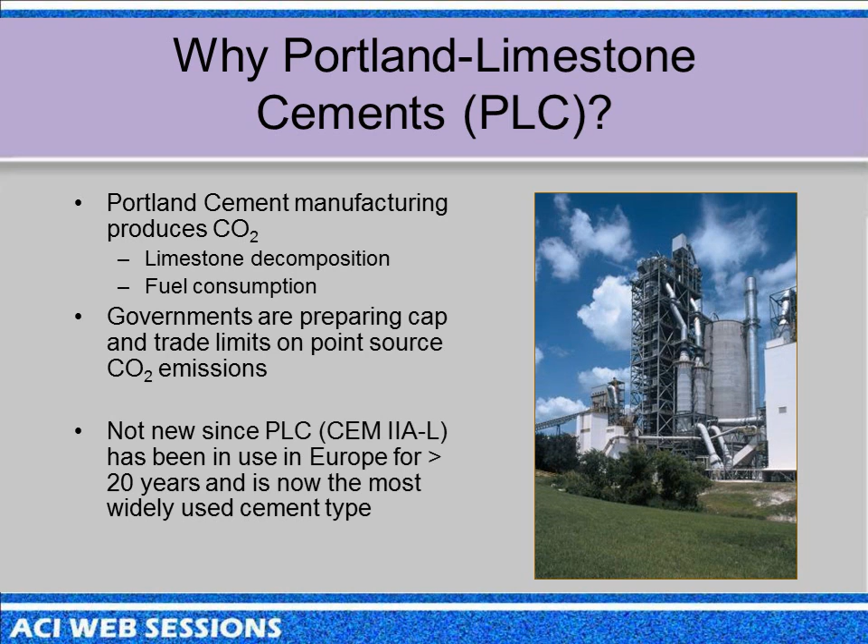And they have two types of limestone cements: CEM II/A-L, which has up to 20% limestone in it, and CEM II/B-L, which has up to 35% limestone in it. It's now the most widely used type of cement. Limestone-containing cements in Europe are now the most widely used cements of all the cements being produced in European countries.

So in Canada, which has the Canadian Standards Association equivalent to ASTM, in 2008 we came up with a new class of cements, Portland-Limestone Cements, distinct from Portland cements. We still have Portland cements, but we developed a new class of Portland-Limestone Cements in our standard, A3001, which contains up to 15% blended or interground limestone replacing clinker.

Actually, we just got rid of the word 'blended' - it has to be intergrounded because that's what the data was based on. Normally, Portland cements contain up to 5% intergrounded limestone. In Canada, they've been doing that since the 80s. ASTM's had it since 2004, I believe. AASHTO M85's allowed it since 2007.

So, in addition to reducing CO2 emissions by putting some of that ground limestone and grinding it in the clinker, you also make the limestone deposits that the cement plant's sitting on last longer, because you don't have that reduction in volume when you calcine the limestone. So they can actually increase the life of their quarry somewhat.

The other issue I wanted to make - when properly optimized, the limestone is not inert, which is one of the reasons for the intergrinding, and it contributes to the properties of cement. It acts in two ways. It acts as a nucleation material for accelerating hydration of cement because you're putting in fine powders.

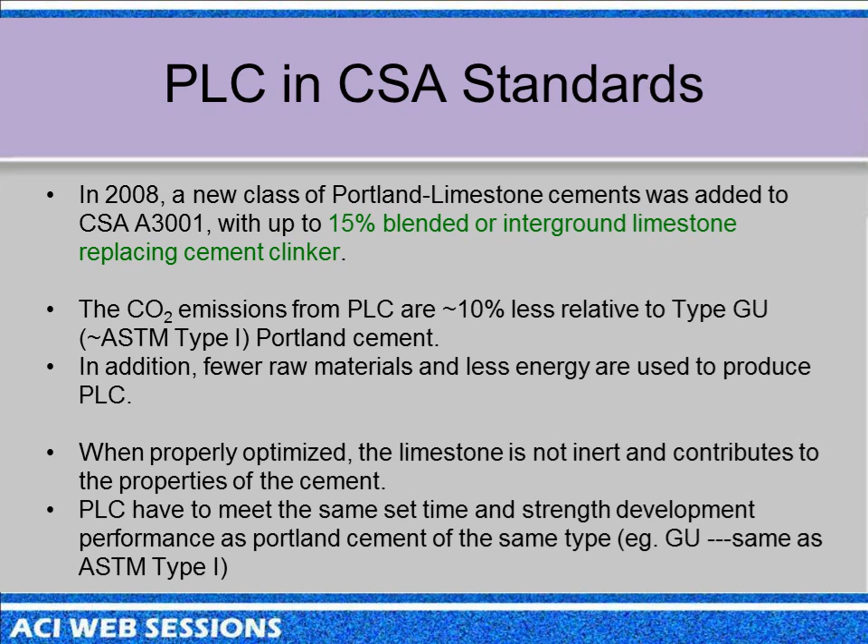Our GU cement - the terminology used in 1157, but it's the same as ASTM Type 1, general use cement. This went into the cement standard in 2008, then got incorporated into the concrete standard in 2009 to allow the use of Portland limestone cement in concretes, with the exception of sulfate exposures - I may or may not get to that depending on timing, but we're addressing that now. Our National Building Code of Canada is being updated now to include references to Portland limestone cement.

So that'll increase its use. Right now, it's largely been demonstration projects until it's in the building code.

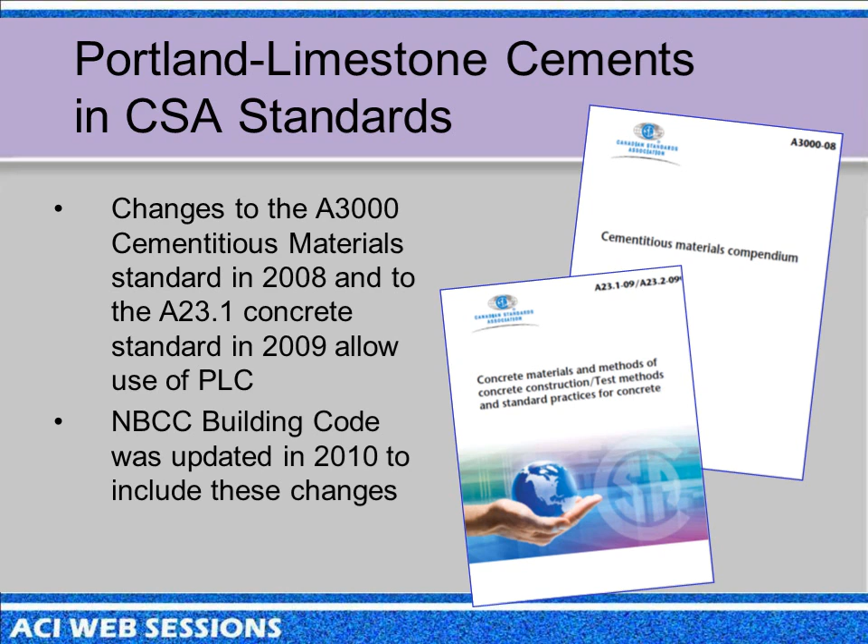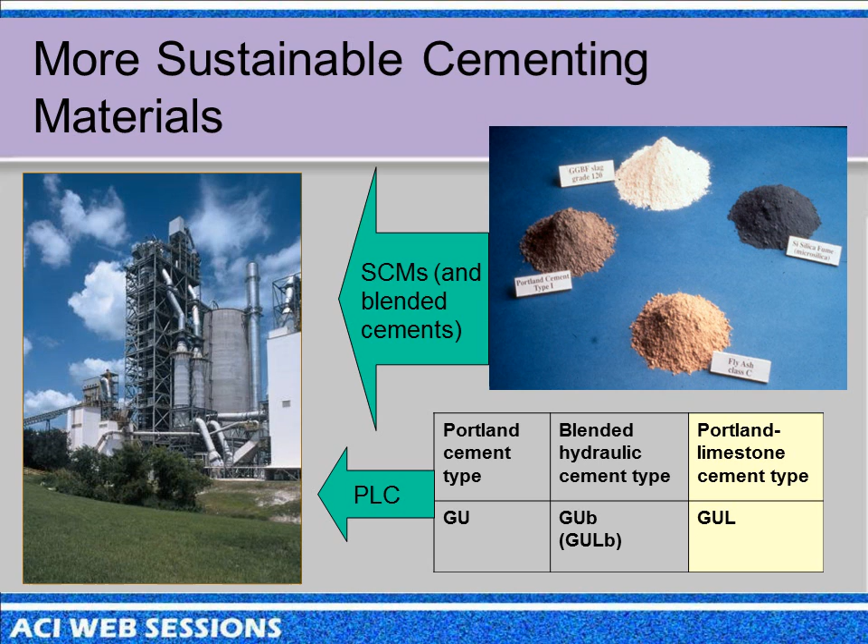This is not to replace supplementary cementing materials. People are either making blended cements or using pozzolans and slag at the ready-mix plant to get special properties like sulfate resistance, low heat, alkali aggregate resistance, and increased corrosion resistance. They do that anyway, but we don't want to impact on that. So the idea of Portland-Limestone Cements is they complement this, they don't replace it. You're not going to trade off fly ash or slag for limestone. It actually increases the replacement of the clinker with the same technical properties, and we have a lot of data showing that slag and fly ash actually work better with Portland-Limestone Cements than they do with Portland cements, which is interesting.

In the U.S., most standards don't allow this, but 1157, the performance spec for cement, does allow it, because it doesn't have requirements on the raw materials that go into the cement, just performance requirements. At least 2 producers in the U.S. are making cements and have been for a number of years with 10% limestone in them under the spec. I'll show a few examples at the end of some U.S. uses. ASTM is looking at changing the 595 blended cement spec in 2011, to be discussed at the December ASTM meeting. It will potentially allow blended cements, including limestone. Mike Thomas and I just finished a report for the PCA summarizing all the data from Canada as documentation to support that ballot item.

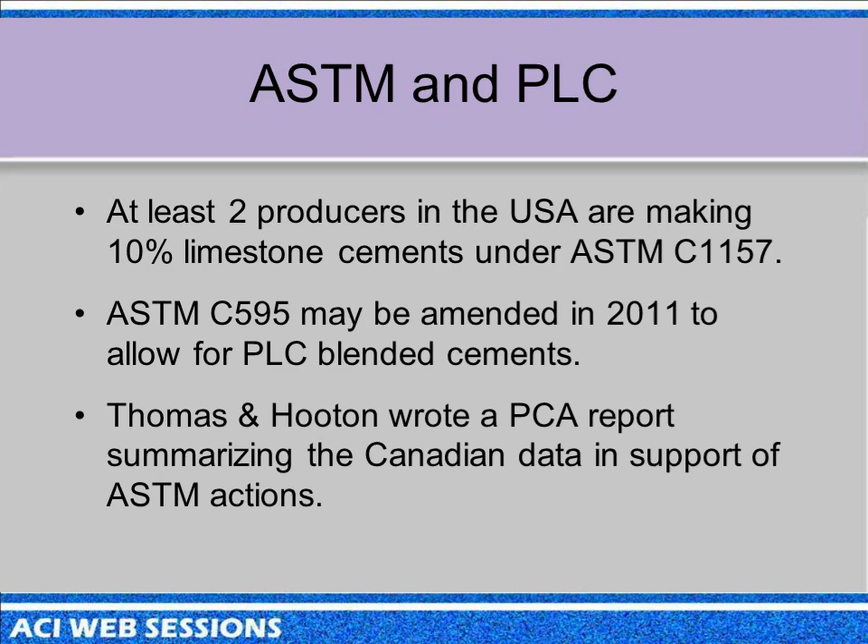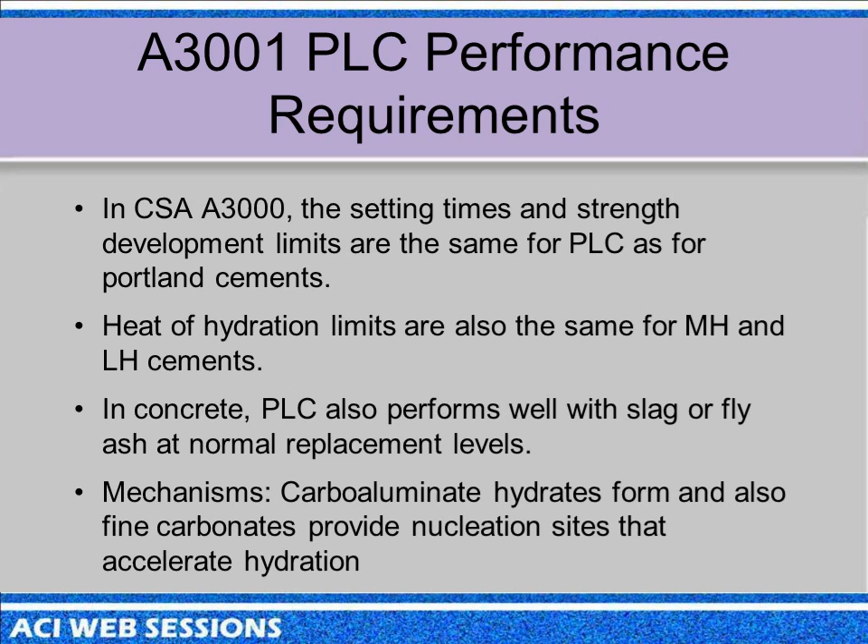As I said before, the standard says the setting times and strength are the same with Portland limestone cements of the respective types as Portland cements. For moderate heat or low heat cements, it doesn't change anything in terms of the performance requirement, the heat of hydration limits. And it works very well with slag or fly ash at normal replacement levels. I mentioned the nucleation sites. The other thing that happens is you can form carboaluminate hydrates. We're seeing increased carboaluminate hydrates from the reaction of the carbonate fines with aluminate phases in the cement, like the C3A. When you start adding things like slag, fly ash, or metakaolin to the system, which have aluminates, you increase the potential for more carboaluminate formation, and that fills in space and creates strength as well.

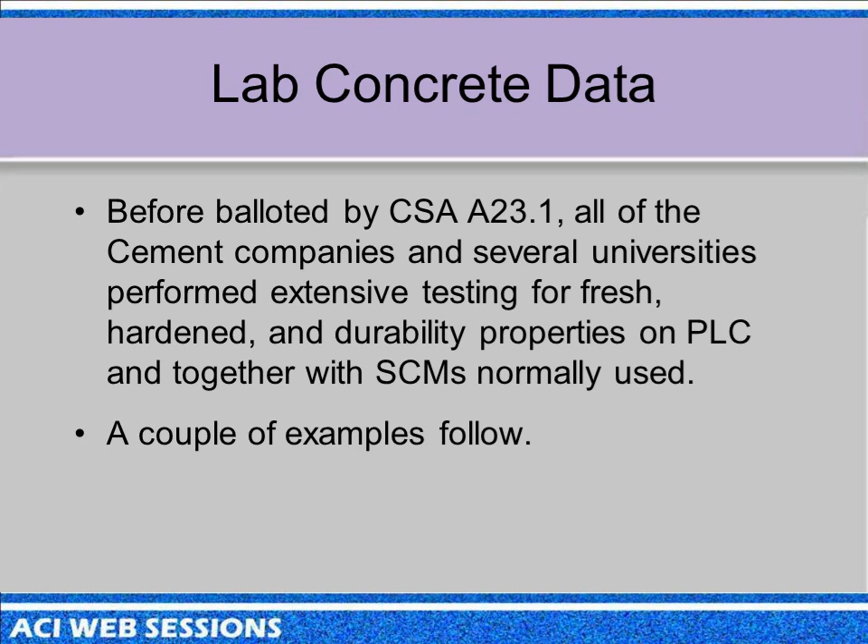We did a lot of concrete data before. We did a lot of cement data initially, and then after reviewing the literature, we did a lot of concrete data. The industry made concrete. Several universities did extensive testing on this before it was adopted in the concrete standard. One of the big issues was, could you use normal pozzolans and slag? I'll just show a couple of examples, some concretes.

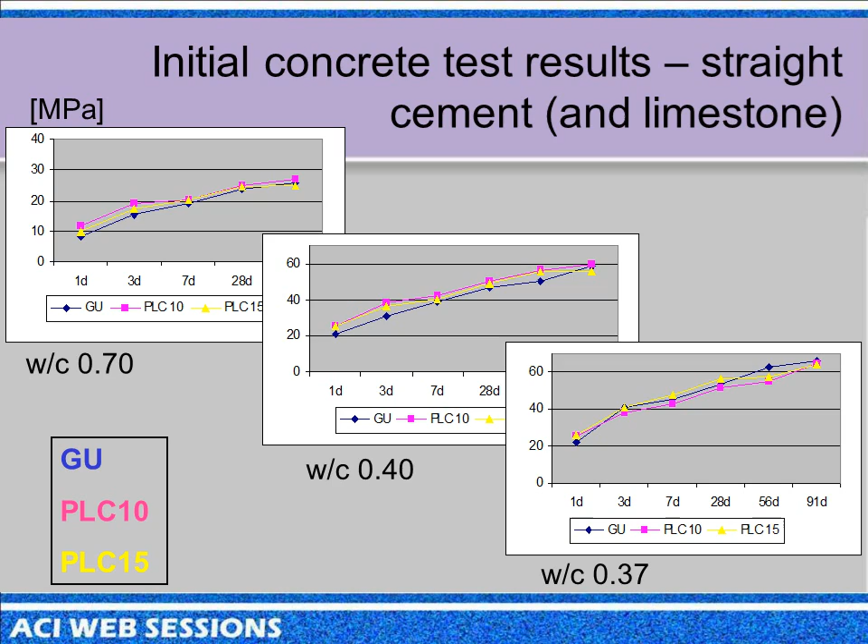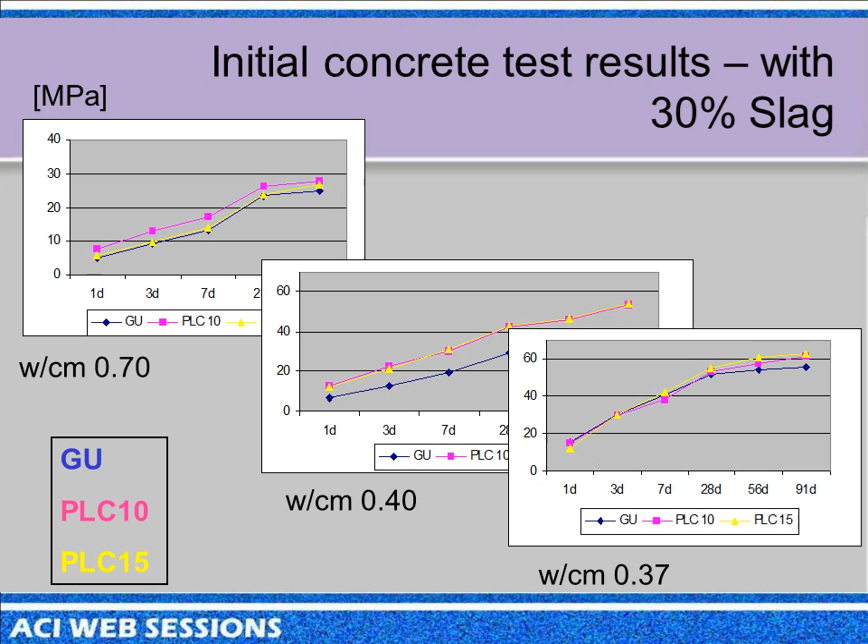If you then take those same cements and mix them with 30% slag, for example, we're actually seeing enhanced performance. In this case, both limestone mixes are showing enhanced performance over the Portland with slag. In this one mix, we're seeing less of that effect, but still, there are no cases where it's worse than.

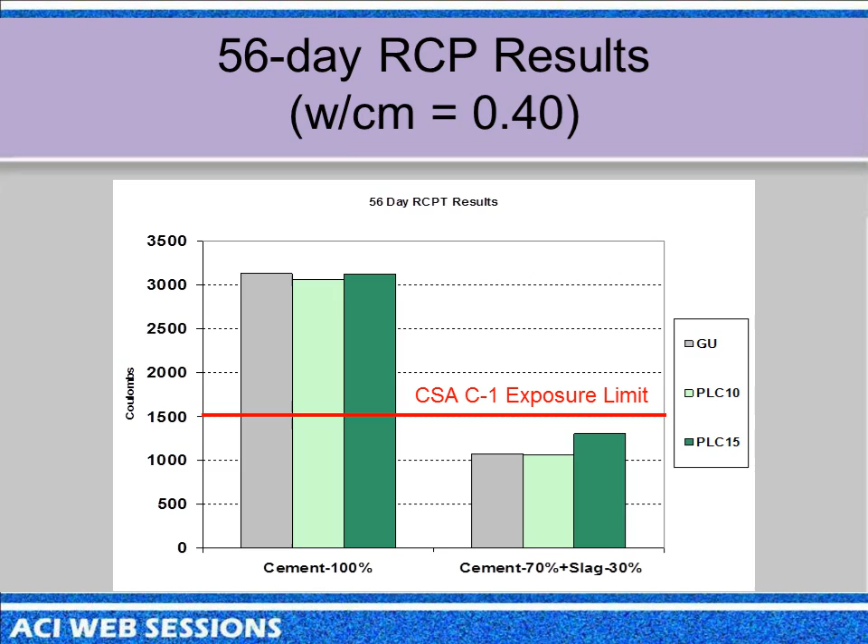In terms of durability issues, just to show some rapid chloride permeability, the ASTM 1202 results, we have a requirement in the Canadian standard for 1,500 coulombs at 56 days for extreme exposures, such as de-icer salt. These are Portland cements with increasing amounts of limestone, and here's with 30% slag. You can say, well, the 15% is not quite as good at 56 days. We wouldn't use 15, we allow 15, but with controls you're looking at 12 to 13% limestone in these cements. At 80, 85 days, they've still improved, and they're down below 1,000 coulombs, and you don't see the difference, even those same mixes at 90 days.

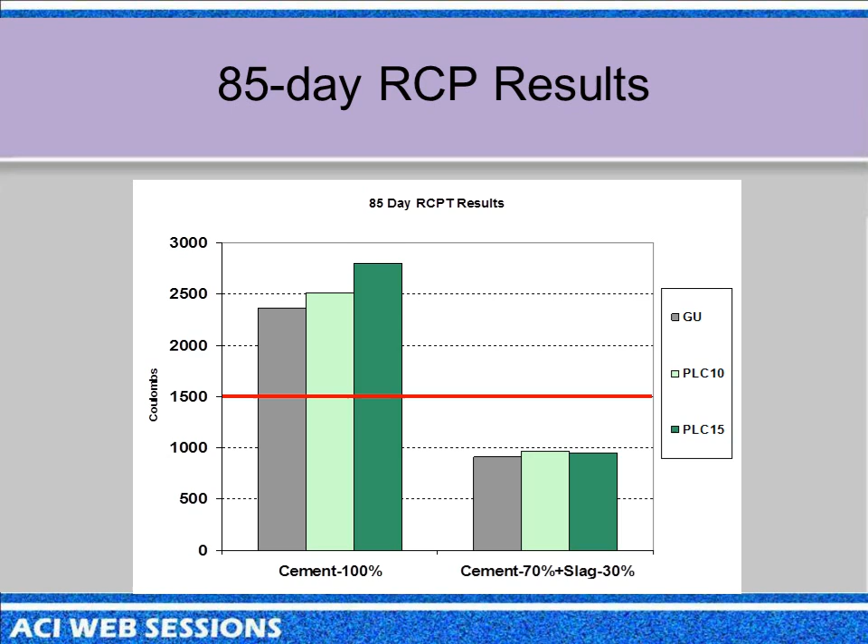We've done a bunch of trials, and this one was one of them. It was published in the Concrete International back in January, so you may have seen this article. I just thought I'd mention it. Mike Thomas and myself, and this was with Lafarge people. They had 8 concrete slabs 2 years ago, just outside of Ottawa, with 3 to 4 inch slump concrete, 30 MPa, about 4,500 PSI, and with different amounts of SCM replacements.

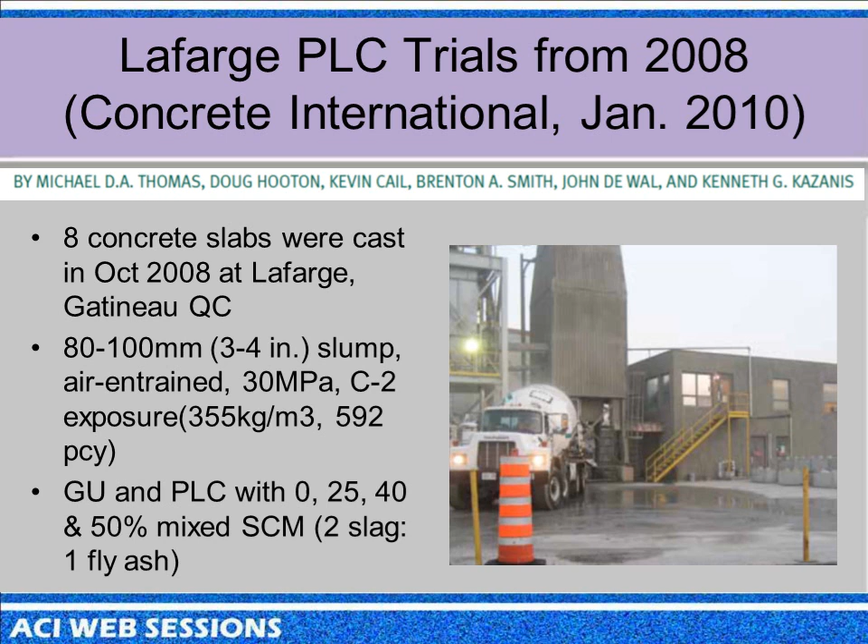They were using a mixed slag, fly ash SCM at 25, 40, and 50% on top of the limestone, which in this case was about 12%. They cast all these slabs at their plant just trying it out.

What you see here is rapid chloride permeability results. These are the 28-day results with and without limestone, and these are the 56-day results with and without limestone. The limestone guys are the open dots, or those blue dots.

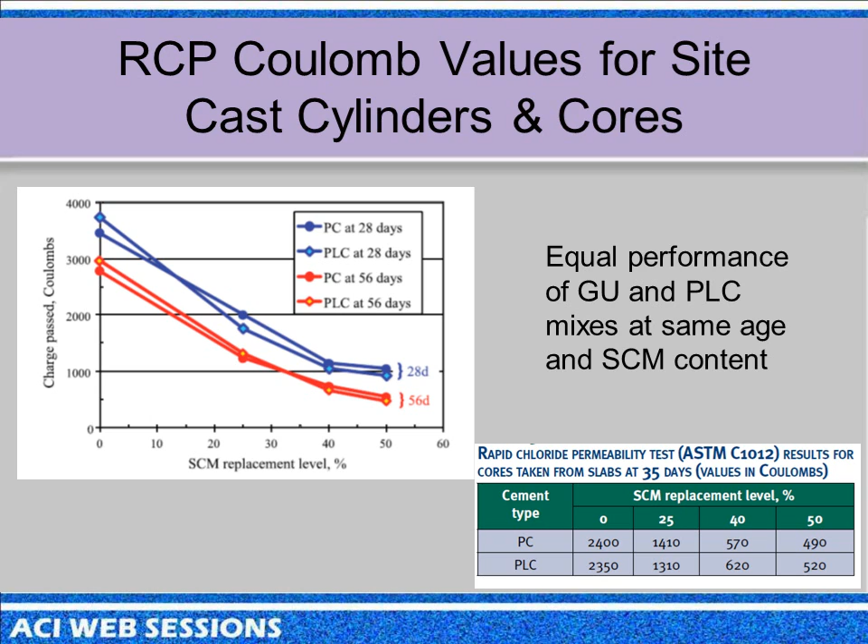You're seeing the same performance with increasing amounts of SCM replacement of the Portland cement or Portland limestone cement. We're seeing the same reductions with the pozzolans regardless of the limestone and regardless of the age. And these are strength results, which of course you can't see well.

They look like a bunch of bars, but this is the straight cement, and the limestone cements are in green with different amounts of SCM replacements. These strengths are going from 3, 7, 28, 56 days, and then 35-day cores are on the right.

These are cores extracted from the site, and the core strength testing was done late in the season. These were done in October, so the cores were extracted early November, and it was cool weather out there, so you wouldn't expect the same curing.

But what you see is that they're pretty much identical at all ages. In fact, even at 3 days, the straight Portland is better than the Portland limestone, but as you add SCMs at later ages, the strengths come up even more.

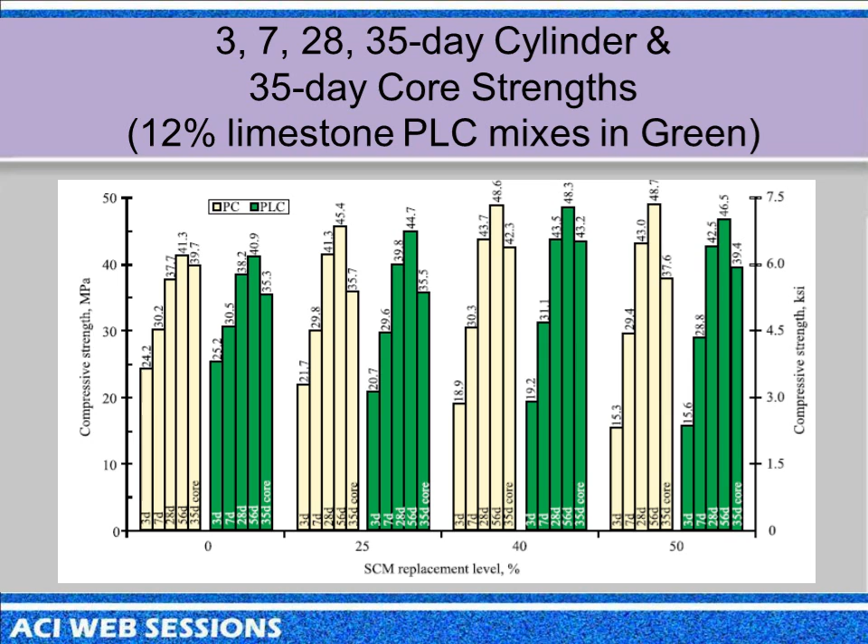We did air void spacing factors on these things, and they're all good—all less than 200 microns, or 0.008 inches. And they all had a 100% durability factor in the 666 freeze-thaw test.

Chloride diffusion results are pretty much the same. The big difference, of course, is big reductions with the pozzolan replacement levels of the cement.

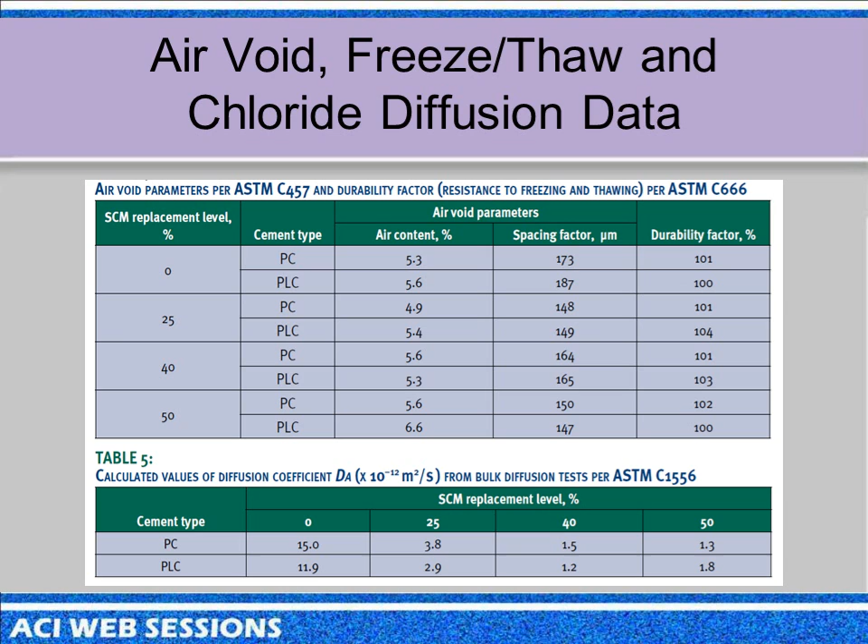We did a barrier wall on a highway in cooperation with the Highway Department in Ontario. This is the expressway just between Niagara Falls and Toronto. It was 3 truckloads of concrete with Portland limestone cement and slag versus straight cement and slag.

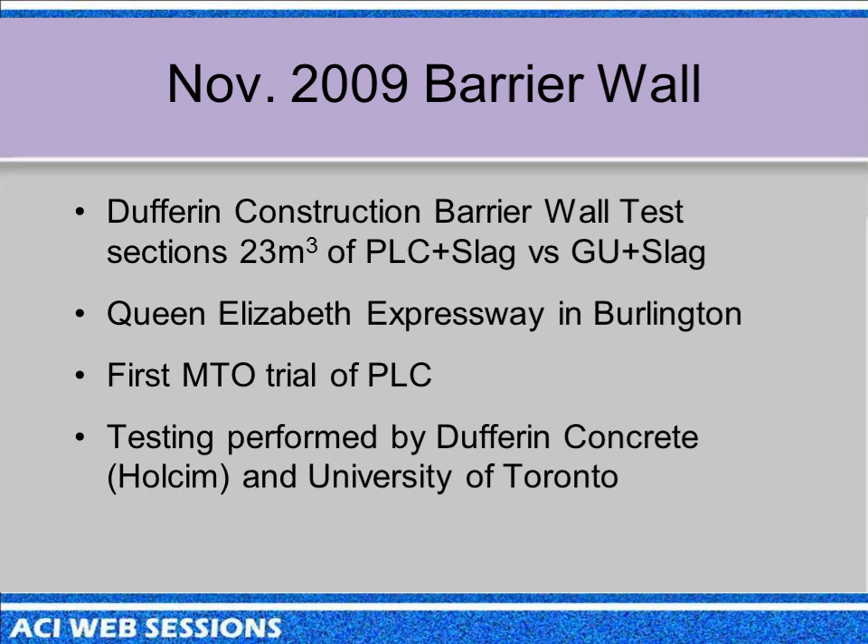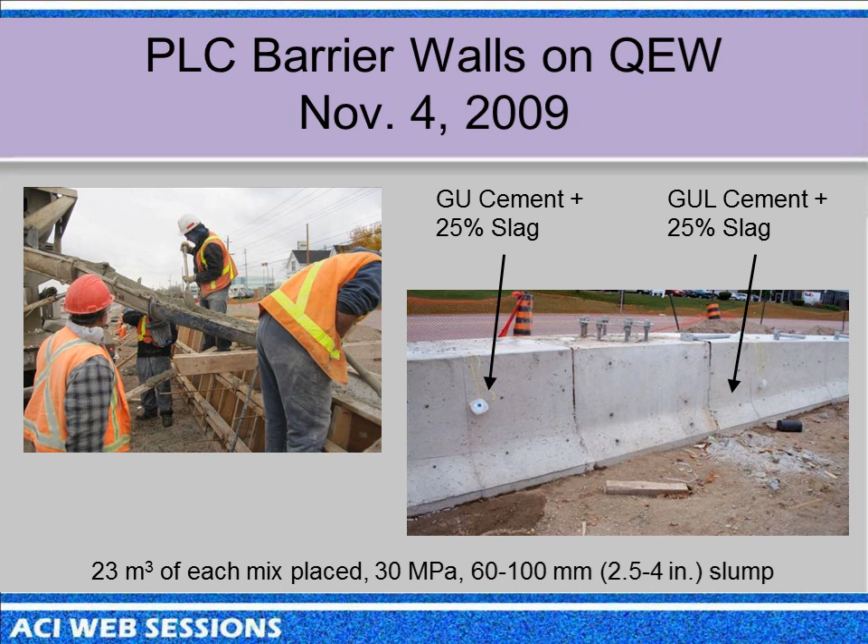We cooperated with the Highway Department and the construction company to get these trials done and have done testing on it. They placed these things—it was a light standard transition on a Jersey barrier wall system, and we did one side with the limestone cement with slag, and the other with straight cement with slag.

Again, 2.5 to 4 inch slump concrete. These are the data, and I apologize, they're only in MPa here. But the shrinkage, drying shrinkage, was identical.

The strengths, even 1-day strengths with the Portland limestone cement and slag, were marginally better—0.8 of an MPa, you're looking at 100 psi. So I wouldn't say that's significant, but anyway, there's certainly no reduction in the early age strengths.

Freeze-thaw durability at 94% is identical. This de-icer salt scaling test is the Highway Department's version of 672, the ASTM test, except that you measure mass loss. It's identical.

And again, the chloride permeabilities are even better with the limestone cement at 28 and 56 days than they were with the straight cement.

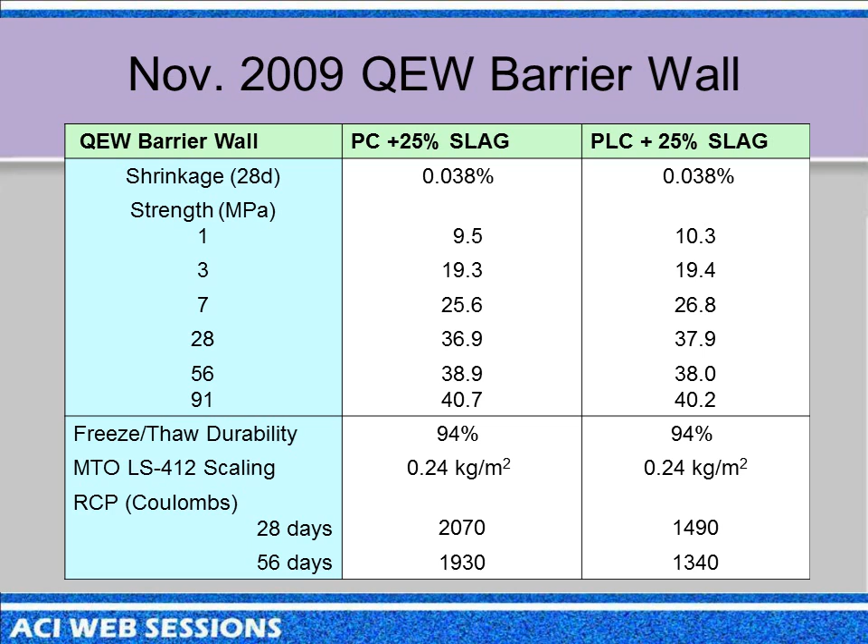Just a month ago, we did paving on one of the major highways, expressways across the top of Toronto, where they're widening the pavement. We did 100 meters of paving with limestone cement, again with slag as a binder.

We did a control section on the same lane further down so we could monitor it for scaling resistance and abrasion resistance over the next year or two. It was a 13-foot wide slip-form paving, about 11.5 inches thick, with pre-placed dowel baskets.

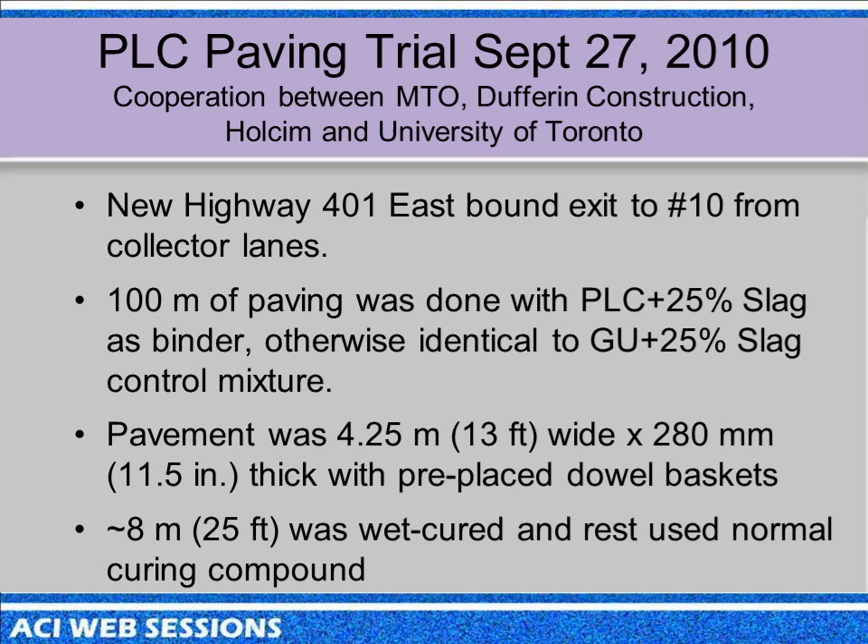We did some playing around with curing as well. They normally use curing compound, but we wanted to look at moist curing as well.

I don't have a lot of data for this because the 28-day test was actually yesterday, and I haven't got the 28-day data yet, but I'll show you the 7-day data.

Fresh tests we did include flexure and tensile because it's pavement, shrinkage, freeze-thaw and de-icer tests, chloride permeability, and chloride bulk diffusion, and we did temperature monitoring.

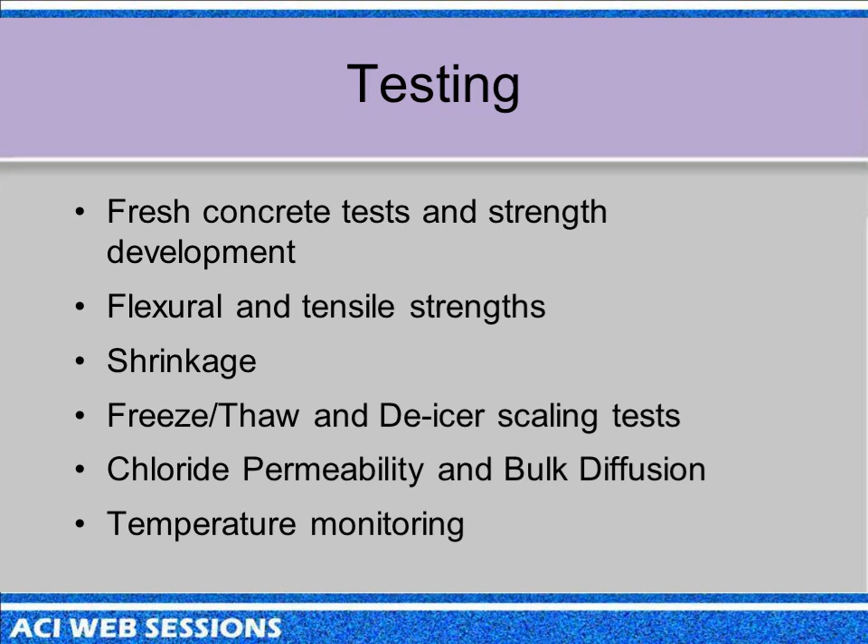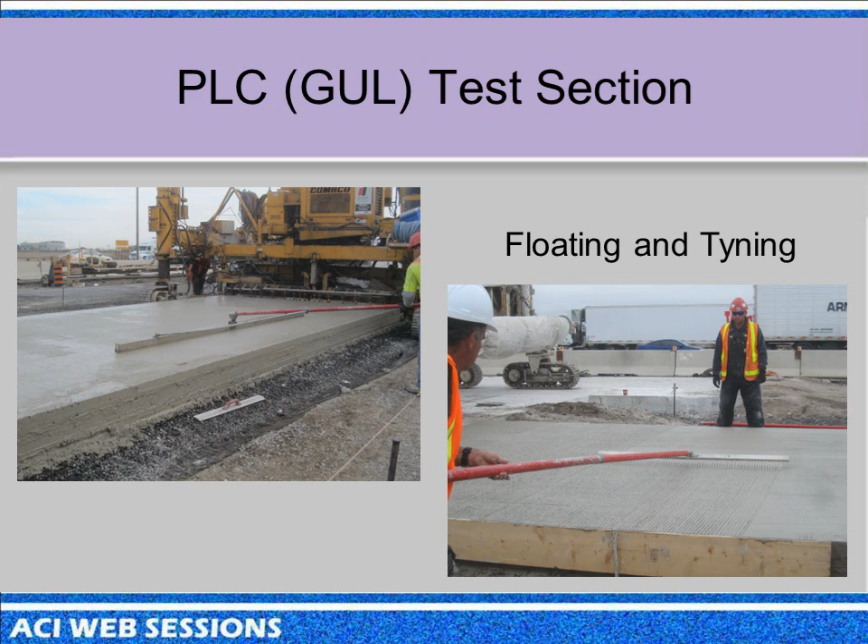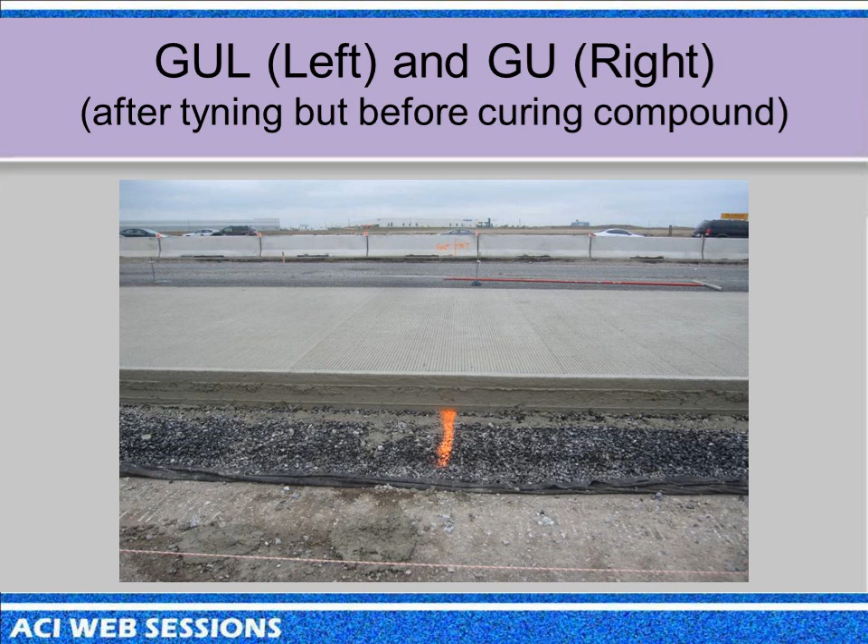Again, Portland limestone cement on the left, straight cement on the right, with 25% slag. It's pretty hard to tell, it looks gray, has tining on it. The orange line divides it, and we've actually marked these so we can go back and find them again.

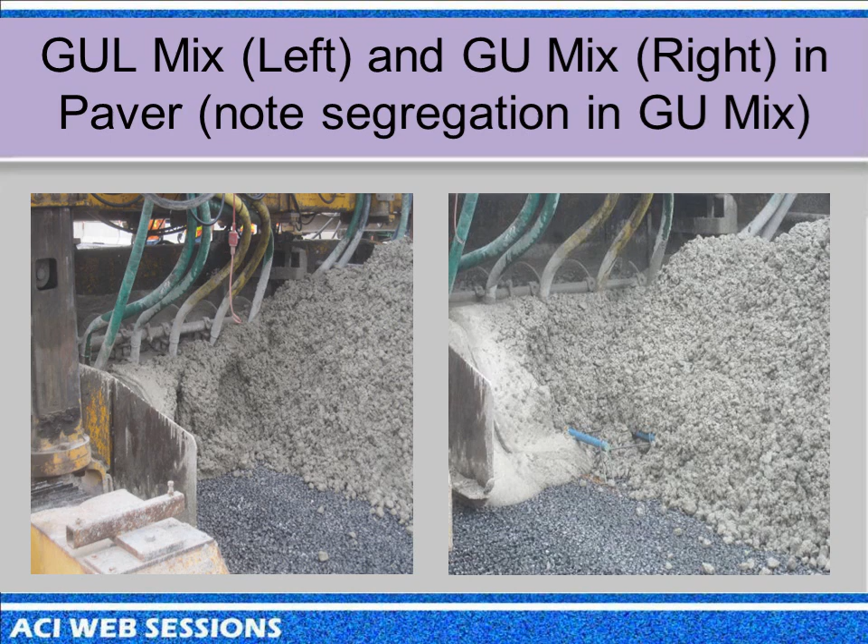That's just the 7-day data. What we did is we diverted one truck. There were like 18 truckloads of concrete in each section. So we diverted one truck to a lab to get the testing done, so they weren't necessarily identical. The slumps were slightly different in this case. They're looking at about 1-inch slump, 1.5, about 5% air. It was about 65 degrees temperature in the concrete. The weather outside was a bit cooler.

The 7-day strength of the limestone mix was lower on this truckload versus that truckload, and the split tensiles sort of reflect that, and the flexurals at 7 days. If this talk was a week later, I'd have the 28-day data.

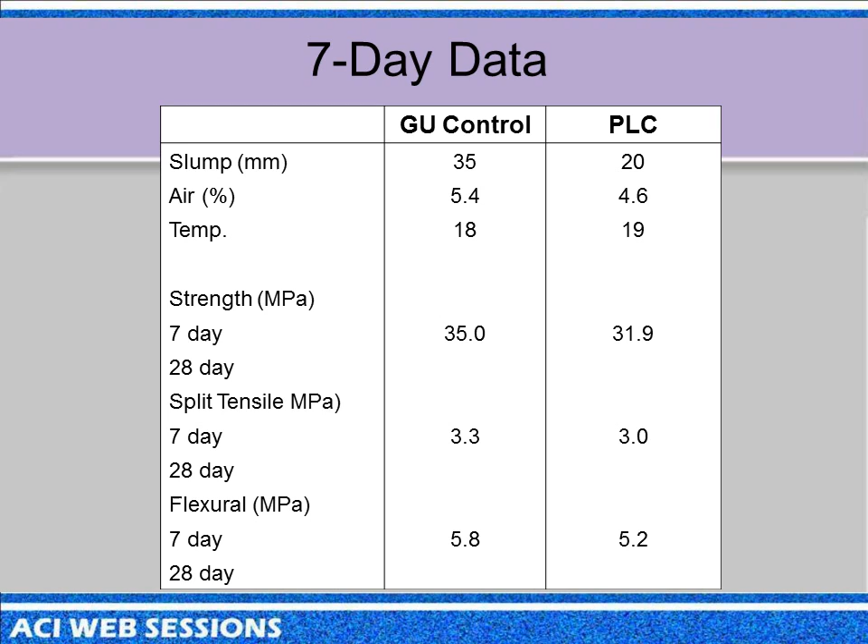In the U.S., Holcim is producing these 10% limestone cements under 1157 in Colorado and in Utah. They've been used in at least 5 state paving contracts, and Tom Van Dam and Al Innes had a talk on this at the Sustainable Pavement Symposium in Sacramento back in September. So I've just got a few slides from them. Again, a lot of these pavements included fly ash.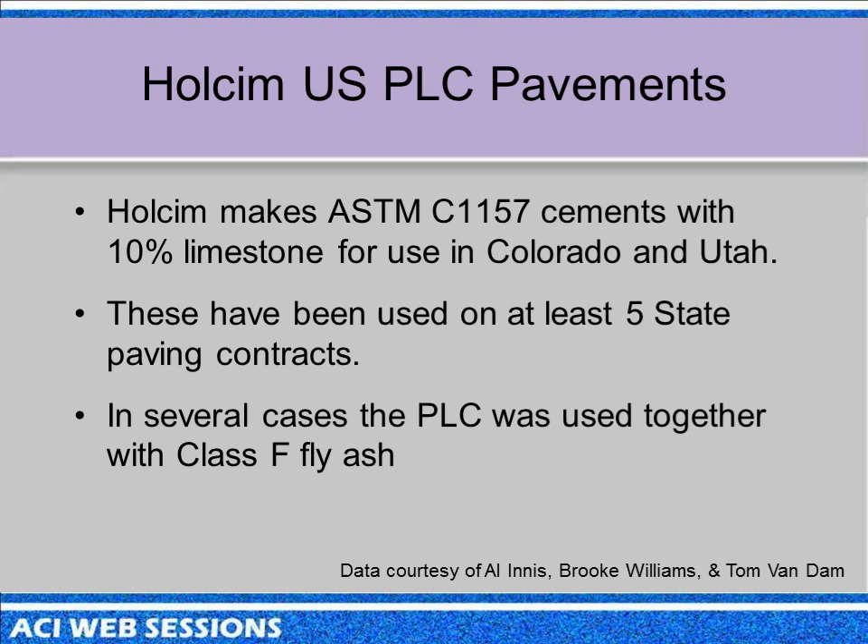I'm just going to show one example where they used it in Colorado. Due to time, 6.5 miles of concrete pavement, 10% limestone, 20% Class F ash, pretty low water cement ratio for the paver. And they were getting their flexural strengths, and the contractor got a quality incentive based on, I guess, uniformity and quality. And this was done in hot weather, in some cases up to 100 degrees Fahrenheit. So they were able to do this, and they didn't encounter any problems with the limestone cement.

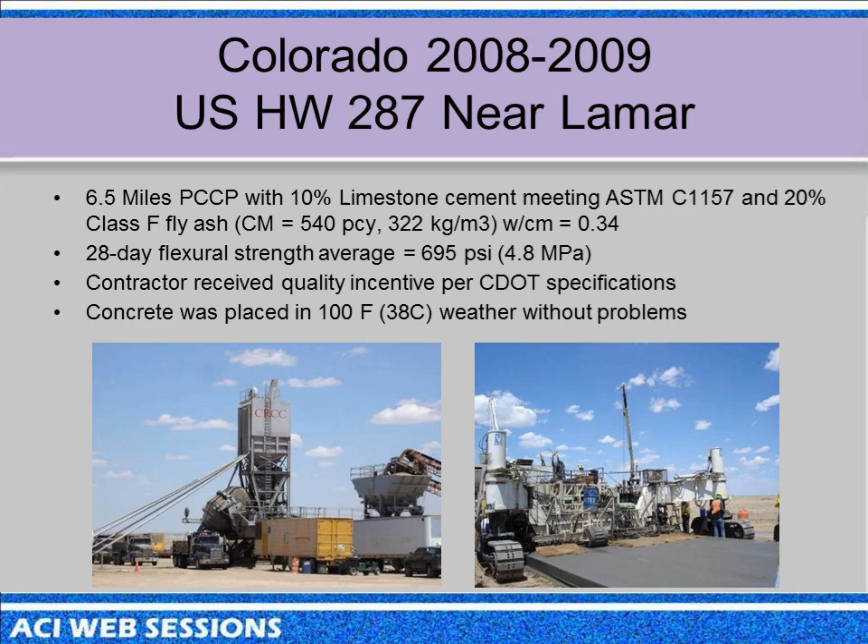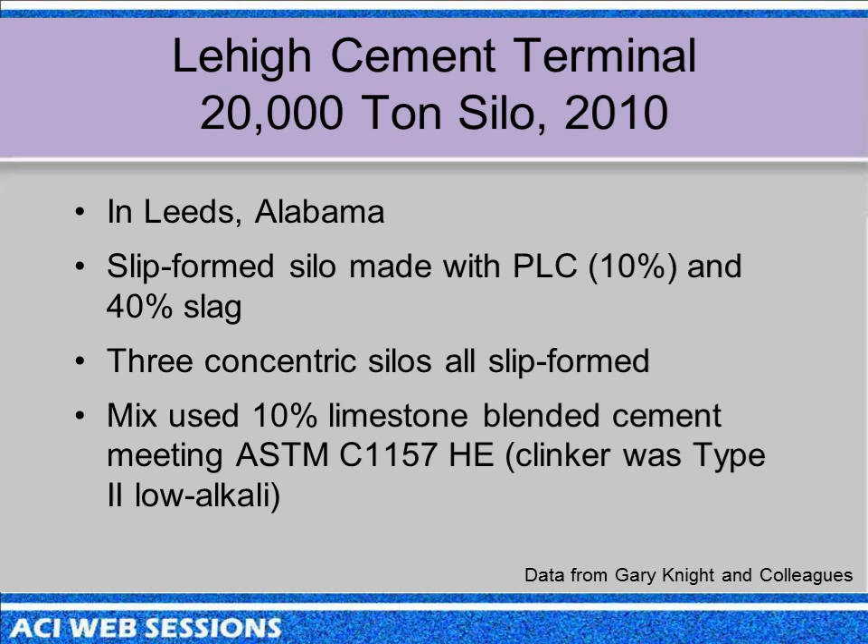Heidelberg, or Lehigh, has also been producing limestone cements under the same 1157 spec for a number of years. They've done a number of projects. One of them was a 20,000-ton slip-form silo at one of their own operations in Alabama. And they used 40% slag together with the 10% limestone, so they're replacing over half the clinker here. 3 concentric silos using a Type 2 low-alkali clinker, courtesy of Gary Knight and his colleagues there.

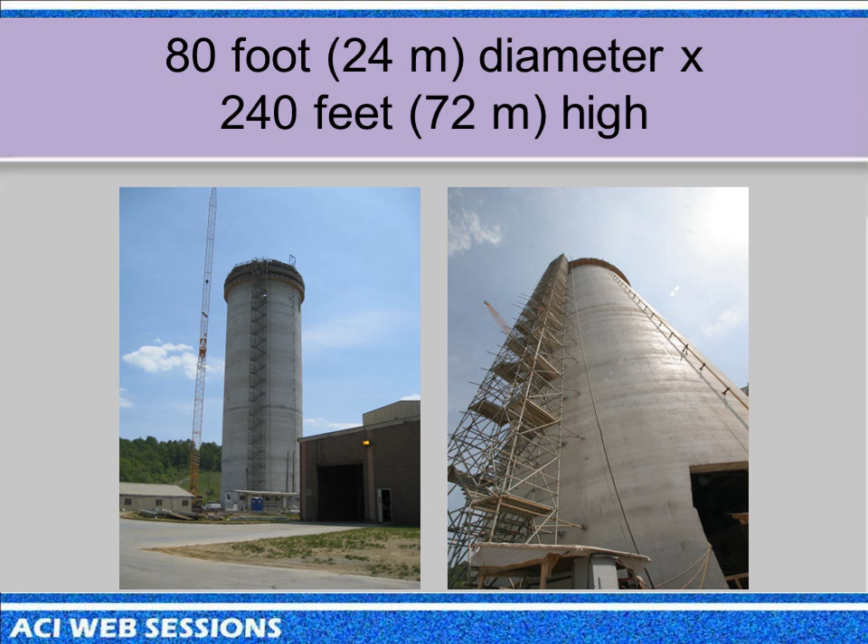That just shows this thing. It's 80-foot diameter and 240 feet high, slip-formed. And there's actually 3 silos, one inside the other. You can see it here. There's 3 rings here. They're all slip-formed independently to make 3 concentric silos.

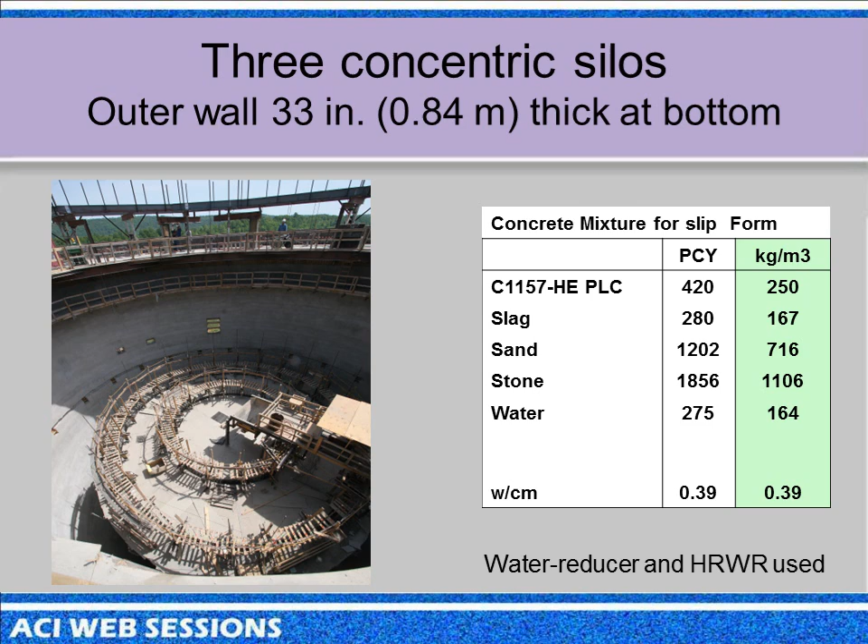That's the mix design, so you can see that they've replaced a lot of the cement with slag. And then of that 420 pounds of cement, 10% of that was limestone. And they used a high-range water reducer for the slip forming. And of course what they're concerned about is strengths for the slipping operation. So they're concerned about their early age strengths as it's leaving the slip form.

They were looking for about 3,000 psi. Sorry, I just marked 20 MPa so it's for the Canadian people to show what 3,000 psi was. That just shows the early strengths that they used as quality control during the slip operation for the 3 different silos. So they were looking at about 5,500 up to 6,000 psi concretes with those kind of mixtures.

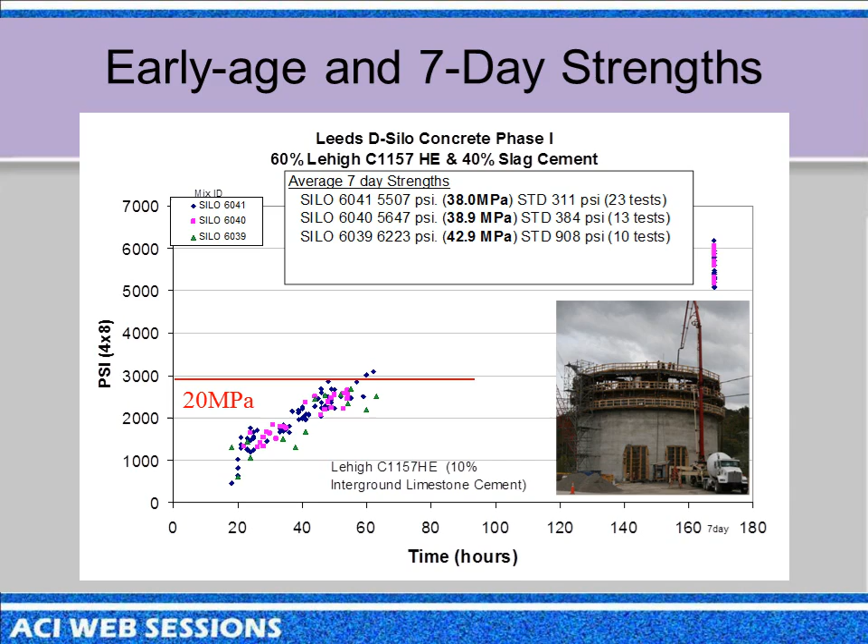So, in summary, these have been used successfully in a number of projects: pavements, barrier walls, and I showed a slip-form silo. But there's a lot of other applications they've been using in a lot of precast products. It works well with slag and fly ash at the normal replacement levels that the ready-mix industry is used to using. It's pretty transparent to the users. They shouldn't see a difference, except perhaps in the finishing, because it actually finishes better because of the extra fines from the limestone. And it allows them to get a 10% reduction in CO2 emissions.

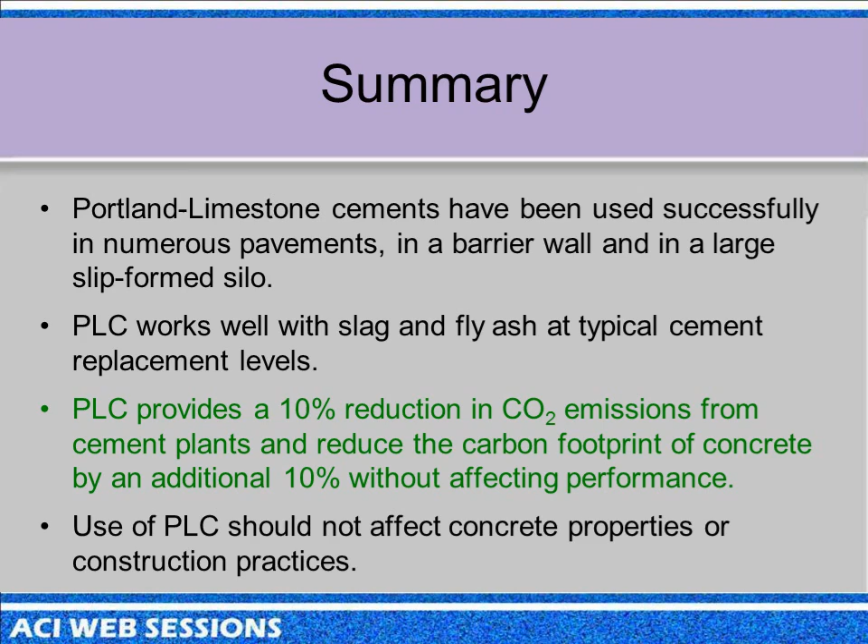So this is something like, although there's all kinds of exotic things, we're going to hear about some really interesting things in the session today. This is something they can do immediately without any impact on performance, pretty much, and affect a 10% improvement in their CO2 emissions. So that's why we're here. Thank you.

Very nice talk, Doug. You said earlier in your introduction that, if time allows, you would talk about sulfate resistance in sulfate environments. Could you please comment on that?

Yeah, certainly. When we did our literature review before we adopted this in the Canadian Standard, one concern was there was a lot of conflicting literature on the role of carbonate fines in sulfate resistance, especially at colder temperatures, because of the potential threat of thaumasite-type sulfate attack, which occurs at low temperatures in the range of 40 to 50 Fahrenheit seems to be optimum. Standard tests, if you do an ASTM 1012 test at room temperature, you don't see this.

So we decided, in the interest of passing this and getting limestone cements into our standard, we'd say not for sulfate resistance at this time. Same restriction applies to mineral fillers, like if you're using limestone fillers in the concrete as well.

So what we've done is set up three research programs - Bob Day at Calgary, Mike Thomas at UNB, and myself - fairly large programs. We've developed a modified C1012 test that you run at 5 degrees Celsius, which is 40 Fahrenheit, and take your measurements there, and you can show that at those temperatures you will form thaumasite.

But we've also shown that with increased limestone, there's an increased risk of thaumasite, but if you mitigate with the same amount of fly ash or slag you would normally use, you have exactly the same effect - you can prevent the thaumasite from forming. So we think we've got a solution to the potential problem.